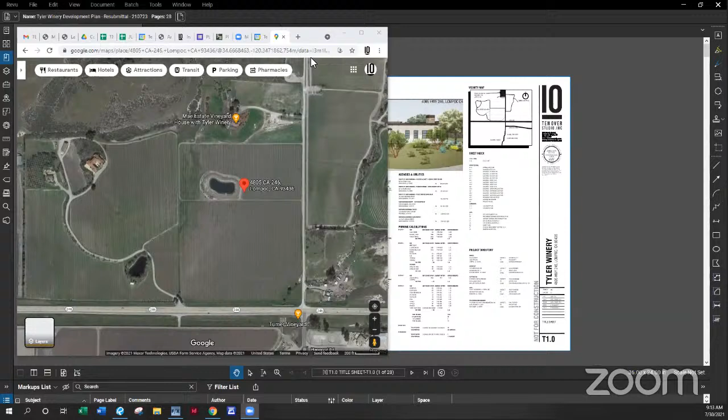Okay, so it's been a while since we were in front of your board, actually a couple years and a couple months here. Our last visit was back in May of 2019. Not that I want to dive too much into the previous design, but I'll give you a visual. This was the initial project scope and design: basically two buildings on the site, which we were locating in the northeastern corner of the parcel.

Since 2019 we've been working with our planner, Shannon Reese, going through the environmental review, getting a biologist on board, coordinating with EHS and the different agencies. But for several different reasons, the client, Justin, decided to make a significant design change from the original two-building design to what you are seeing today and what I'll present, which is still a development in the northeastern corner of the parcel.

The biggest difference is that we've moved away from building one here being a two-story building in that original design to now being a single-story building, creating a cluster, a courtyard effect with four different buildings, each serving a different purpose in the winemaking process.

The reason for moving away from the original design was to create a more efficient operational flow with winemaking, recognizing that the second story was serving office space, administrative needs, and guest serving on an appointment-only basis. It didn't need all the grading work and effort of bringing that secondary road and turnaround up top, and we could achieve that with a more understated and simpler design through building 4 down here where my cursor is.

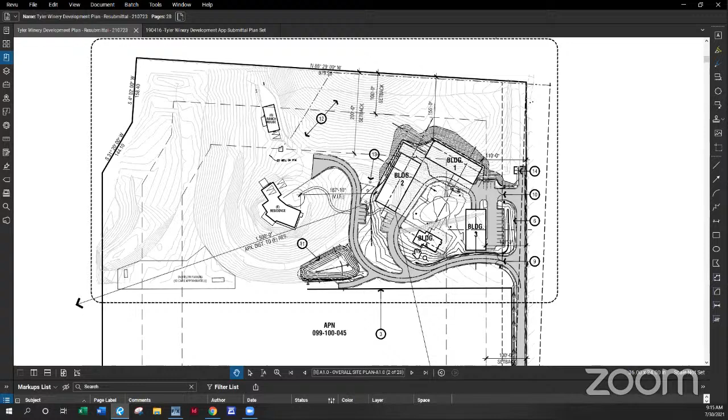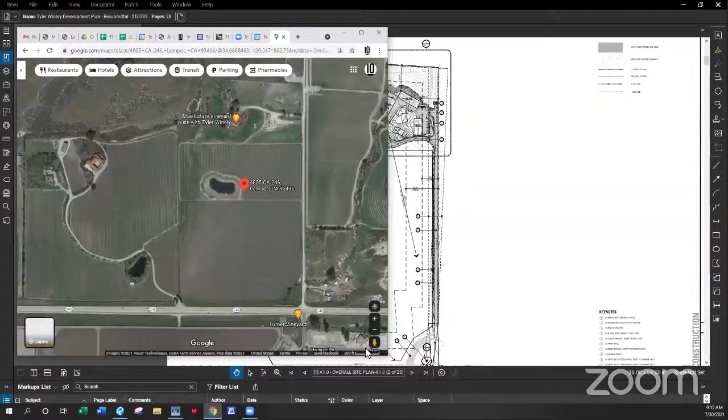Just to back up a little more, if you weren't familiar, here's the overall property in Google Earth. Street view is right here. Actually, wait, let me see if I'm turned around. I might be, hold on one second. No... Isn't quite looking right, let me go back.

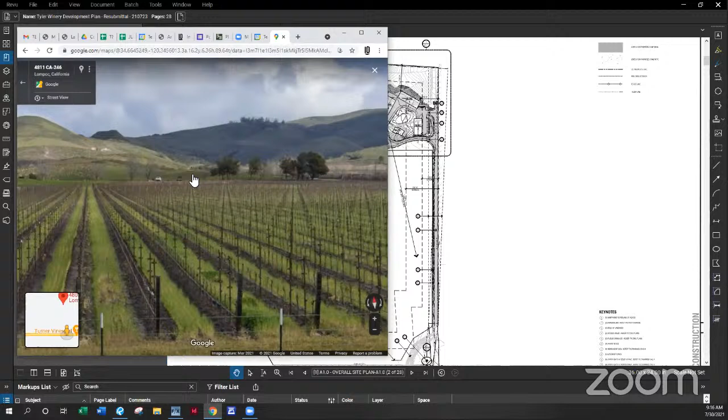There we go. Okay, so here's the vineyard fronting Highway 246. And if I zoom in here, you can see there's the existing residence. And then where this grouping of trees are and where these cars are is approximately where these single-story buildings are going to go, in the northeast corner of the property.

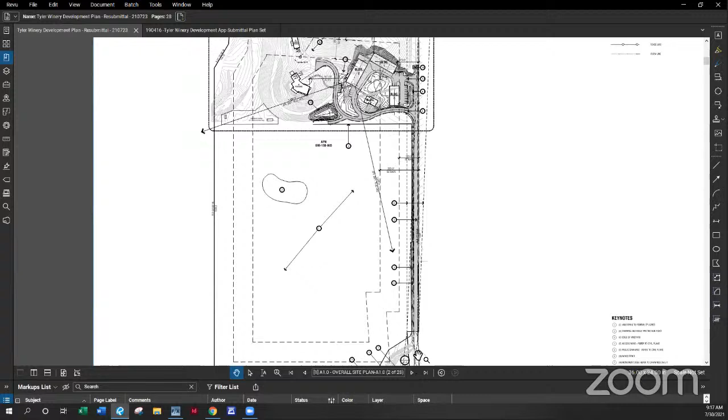There will be a shared easement, which links to adjacent parcels to the north. And so this road will be improved to CAL FIRE standards, coming all the way off of Highway 246, from down here where the gray hatched area is.

As you approach, the intent of the layout is there are 2 gate entries, both of which we've reviewed with County Fire to make sure we're providing adequate access and addressing their needs. The first gate, the southern gate, would be primarily used for access to the existing residence and ranch house, but also giving guests who are coming for an appointment access with a small grouping of parking spaces here to the south of the building cluster.

The secondary gate would be used more for production needs, as this area, shown with a lighter hatch, is a concrete working space, so to speak. And then the center area is just outdoor gathering space.

So I briefly touched on building 4, which is offices. I'll go through the floor plans and elevations shortly. It's offices and guest serving space. Building 2 is wine production, the tank room, and cuverie. Building 1 is barrel storage and case storage, and building 3 is an accessory ag building for farm equipment. This is an estate vineyard, so there's plantings here as well as an additional vineyard block to the north.

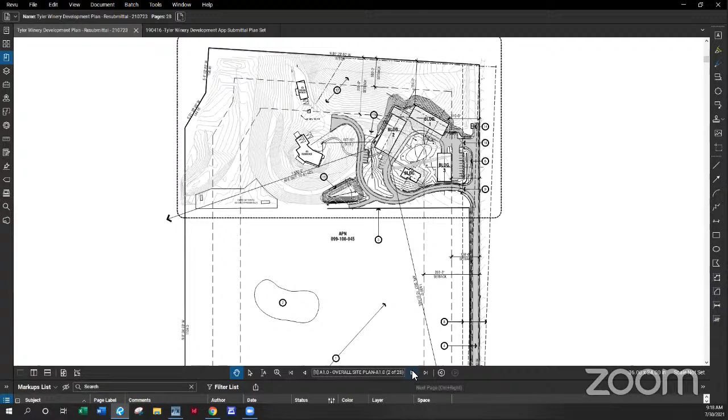Feel free to interrupt if there's any questions so far. So I'll just quickly go through the floor plans. I do have one question: how high is your office above the road directly below it? I don't see a grading plan yet.

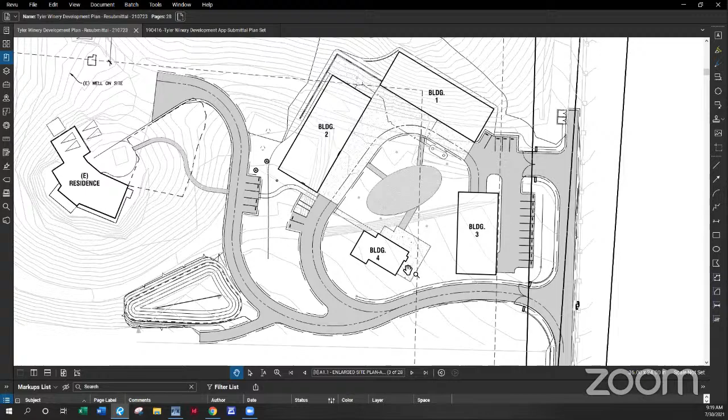Oh yes, I'll get to that shortly. That was another reason why we worked on this. You can see this is showing a good look at the existing topography. The hillside, building 1 will be banked into the hillside quite a bit, but we're trying to work with the contour to minimize slopes for this circular vehicular path, keeping them below about 6%. Our civil engineer is on the call, but we're picking a contour here below this bench right here. So these buildings are pretty much at grade with your gate entrance here, and that sets the stage for the finished floor elevation for each of the 4 buildings.

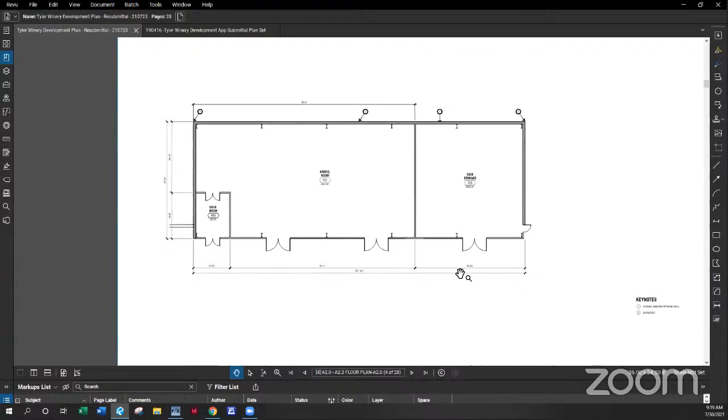This is a simple floor plan for the ag storage building, just giving tractor access. And this is building 4, a small building which you'd come into from the east, from that parking area, to a small reception area, an informal living room setting for appointment tastings, a staff break room, 3 offices to serve approximately 5 staff, and accessible restrooms.

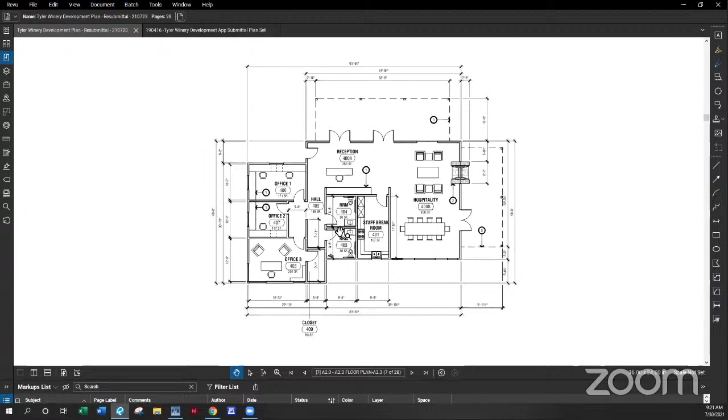These are just going through roof plans. I won't spend too much time on this unless we need to come back to them, but I'll jump quickly to the elevations.

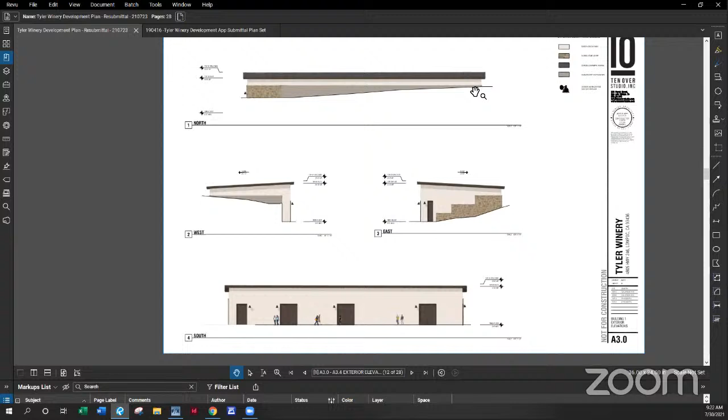This is the elevation you'd see of building 1, the barrel storage building, which is a pre-engineered metal building. The exterior materials would be stucco prominently, but where retaining walls exist, we'd have cast in place concrete, which for the most part would get veneered with a natural stone veneer, not cultured, but true stone veneer. Along the north elevation and potentially the east elevation, we'd change to a standard smooth finished gray concrete, consistent with what's indicated on the material legend.

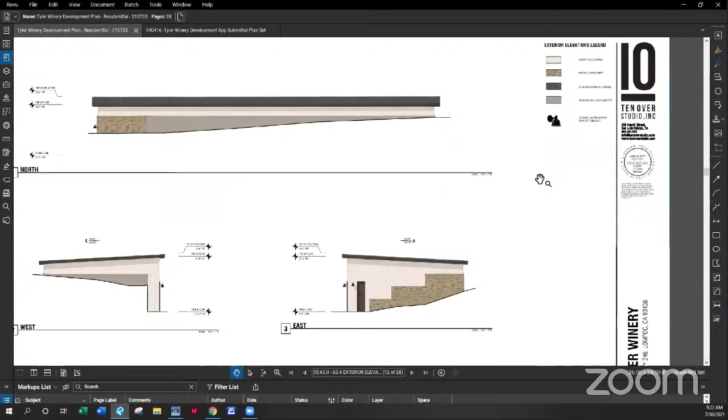Any outdoor lighting would be downward facing, dark sky compliant, and we've indicated those locations on the elevations, mostly pairing them with entrances into the building.

Building 2 is the tank and cuverie room building. Again, similar material palette, standing seam metal roof—I don't think I mentioned that for the previous building. These are low slope roofs, but we will do the appropriate detailing, ice and water barriers and whatnot, to coordinate with the standing seam metal roof.

This building does have what I'd call spandrel glass, like a seamless glazing system on the south and east corner, which gives guests visiting an opportunity to look into the cuverie, which has these beautiful wooden oak tanks.

Some detailed elements here: stone veneer at the base of the glazing system, and then all of the doors will be painted metal, like hollow core metal door systems and/or roll-up doors.

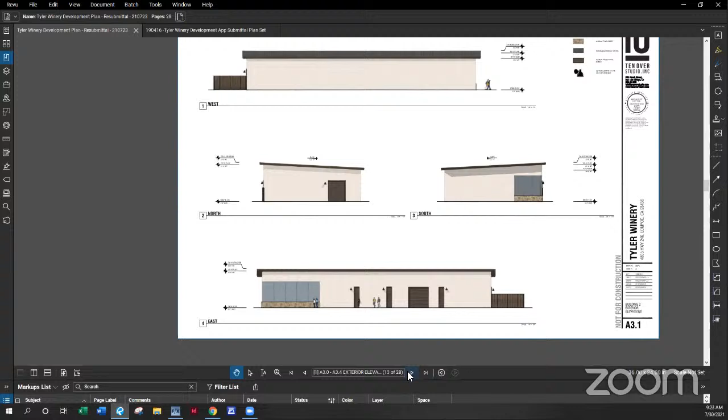The ag building is also a pre-engineered metal building. We're changing up the siding here. This one is the building furthest to the east, which faces the easement road, and just in character with its use, we wanted to change up the materials.

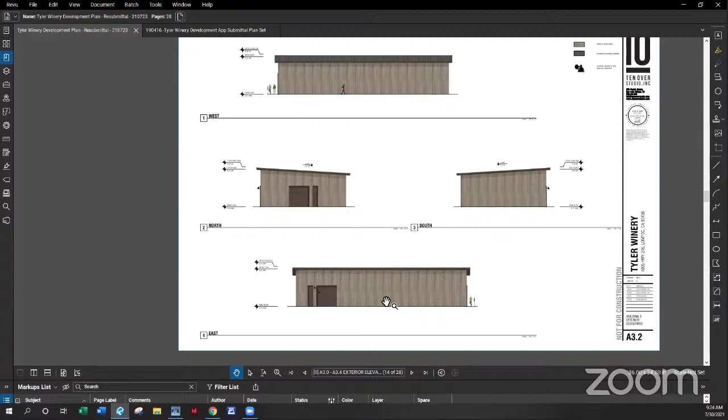This will be a vertically applied tongue and groove, likely cedar siding, but in order to do that it's a rain screen detail. One particular product we're looking at is hewn—to be determined—but it'll be stained to get this somewhat weathered look you see in the rendering.

Lastly, this is the smaller building 4. This elevation has a similar palette, a nice warm white smooth stucco. We're looking at a couple different window systems, but they'd be aluminum clad and/or steel window.

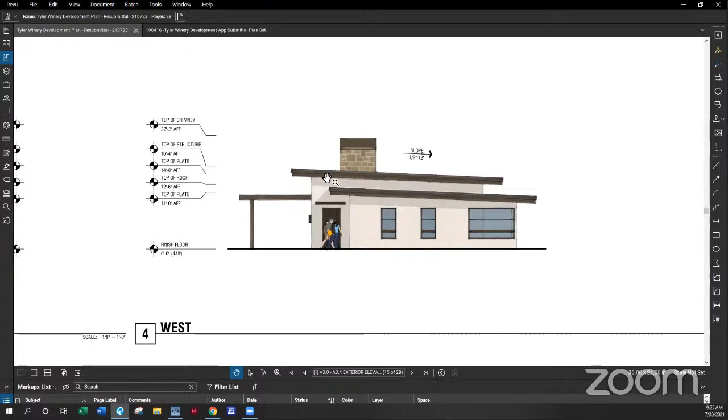We need to make sure we're complying with Title 24 and energy efficiency. There's also a change in roof elevations—a lower set roof over the offices, and a higher set roof over the hospitality or reception living space.

This is indicating we'd have a pergola system on the north and east sides, which would have retractable shades, and you can see that here as well.

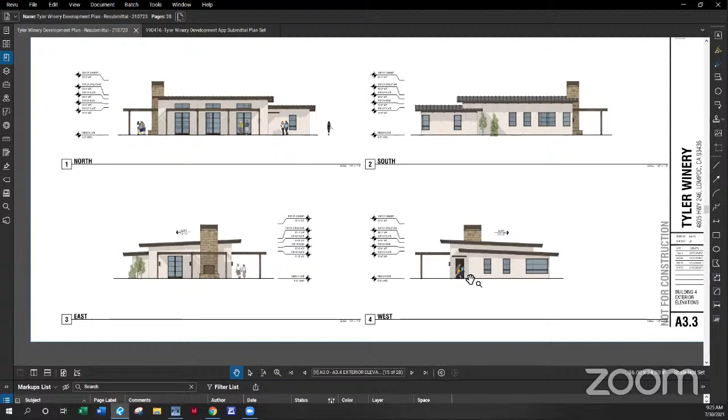This is the east elevation as you approach the building, and this is the south elevation as you drive in. You can see that standing seam fireplace element on the east side, again with the same stone veneer we'd be using at the other two buildings.

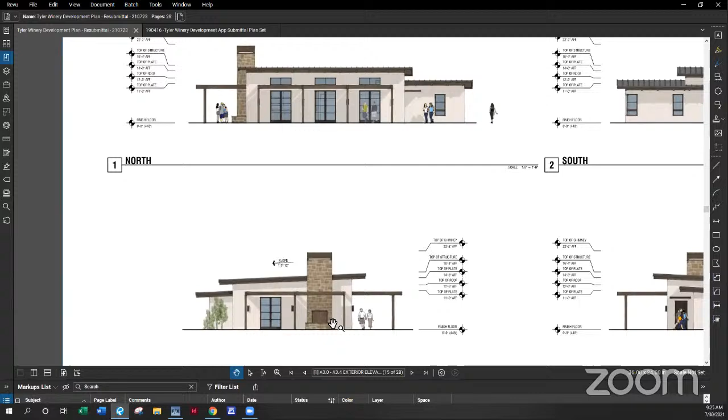This is the elevation facing east with the outdoor patio. I'll go to the landscape plan in a moment so you can see that outdoor context. And then this is the north elevation.

We have a couple of other site details. Your entry gates, similar palette of vertical stained wood boards for the gates. These would be swing gates, and then stone veneer pilasters.

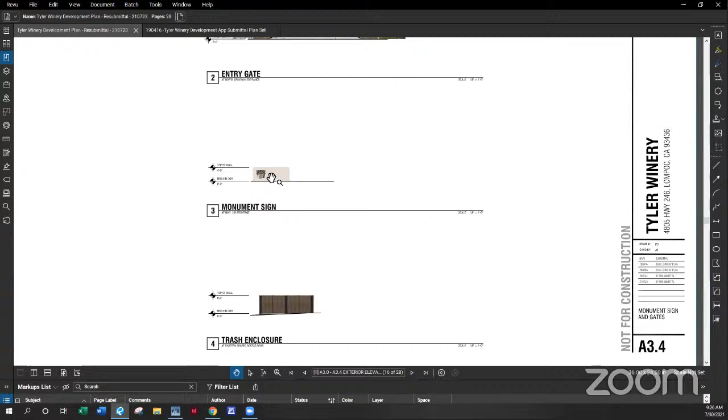This here would be a monument sign, which we've indicated down closer to Highway 246. I'll show where it is in the site plan—small, at a height of 4'6" and approximately 8 feet long with the Tyler label.

And then this is just an elevation of the small trash enclosure, which is accessed from the easement road on the eastern side of the property.

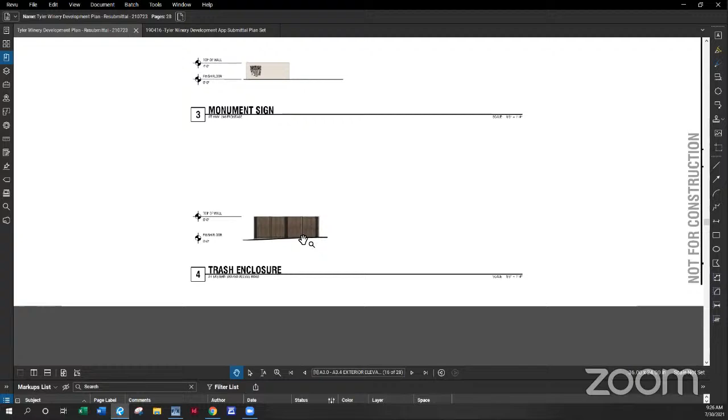Moving forward, these are a couple of context views of the existing site. Here's a view looking west, and you can see there's an existing road that comes into the site right through here up to the residence.

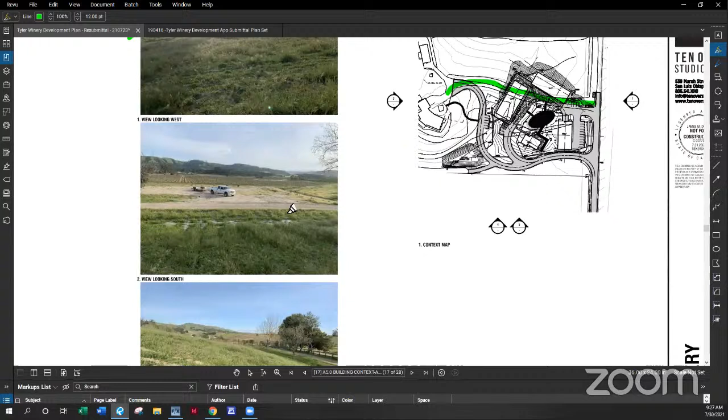Looking at the planted vineyard block and the hillside, this is standing on top of that hill looking down to where the buildings would be placed, just north of the existing vineyard on the south side. This is a view looking east from that hillside that building 1 is banked into. And then these are views atop the hill looking north at the knoll existing on the property.

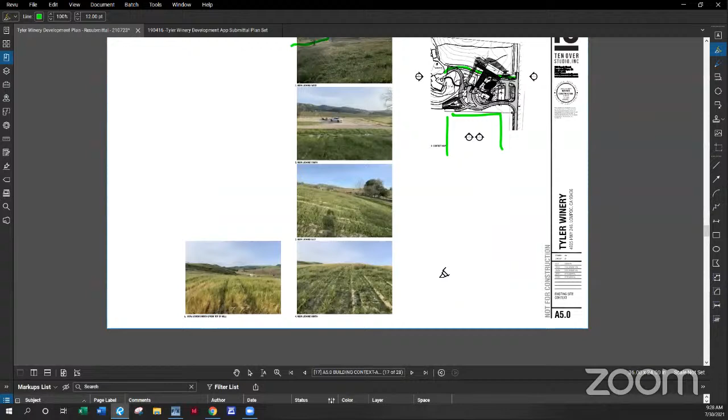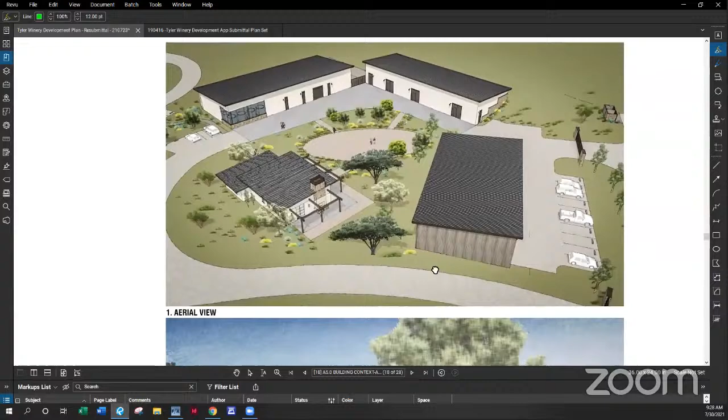This page shows some context views - I'll zoom in a little, but I don't want to move around too fast. This gives you an aerial of the 4 buildings in that central courtyard. This is a rendering showing the entry into building 4, and this is a rendering looking from the eastern patio at building 4 towards buildings 1 and 2. Then this is the north elevation of building 4.

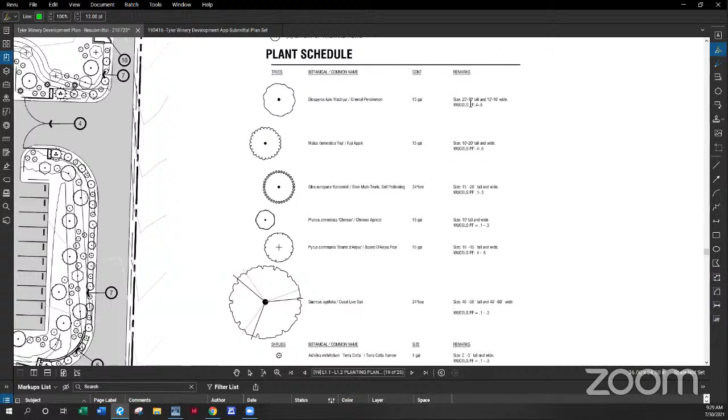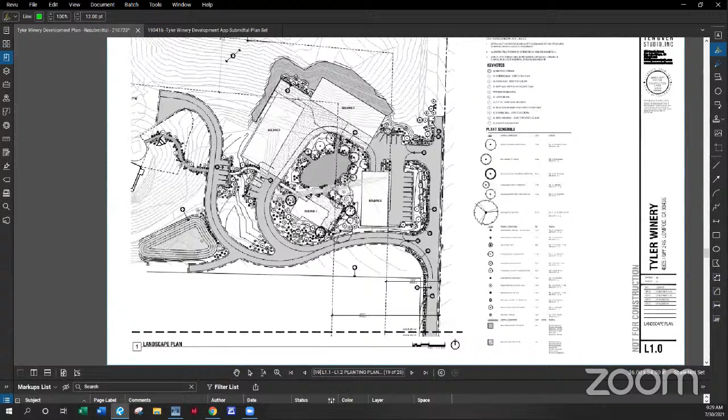We do have a landscape plan, and we've been coordinating with our biologist. There were a couple of different recommendations he had in terms of native plants, but the plant palette is all drought tolerant. Our WUCOLS plant factors here are all low plant factors, so low water using natives, primarily clustered around the courtyard space of building 4, but also planting along Easement Road as you come up from Highway 246, giving a bit of screening for building 3, and some intermittent planting along this pathway leading up to the residence.

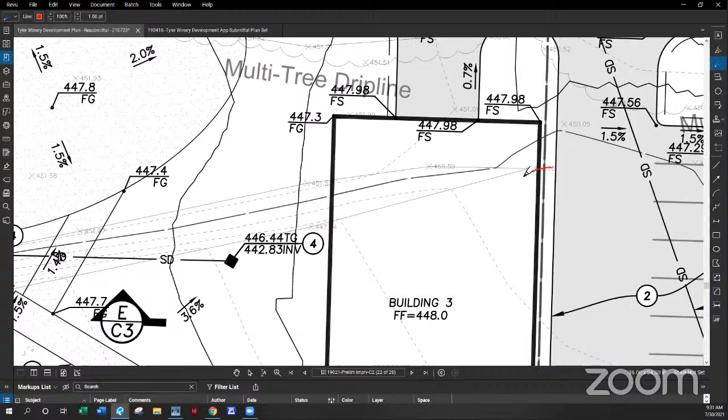The slope, these are all proposed grades back here, at I believe a 3-to-1 slope, which is still plantable. All 4 of the buildings are set at the finished floor elevation of 448, and that contour is right about here, existing on the site.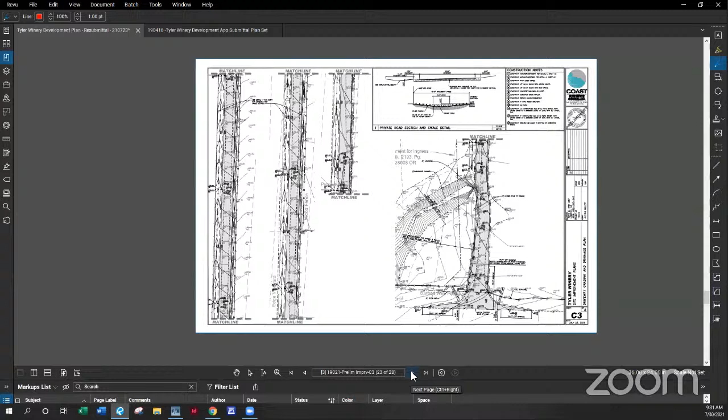With that, the rest of the sheets in the set are more technical drawings of the grading and drainage design, and here are cross sections of the site, which we can get into if desired, but I think I'll go ahead and open it up for any questions.

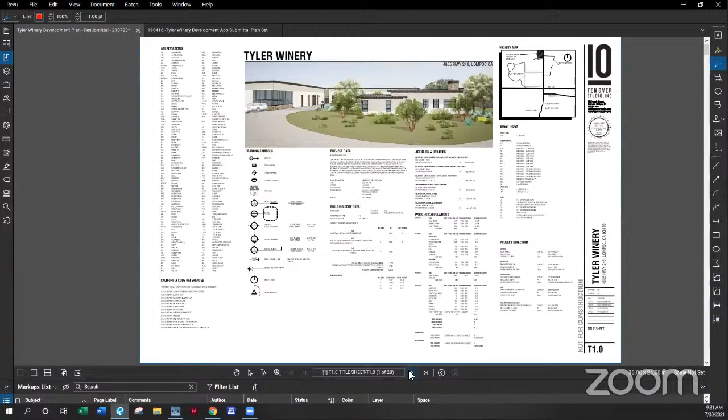I've got to find my sheets. Wait a minute.

Well, Jim, while you're doing that, I have a quick question. Julia, what's the material in the sort of elliptical oval shaped area in the middle there? That's planned to be decomposed granite, so a permeable surface.

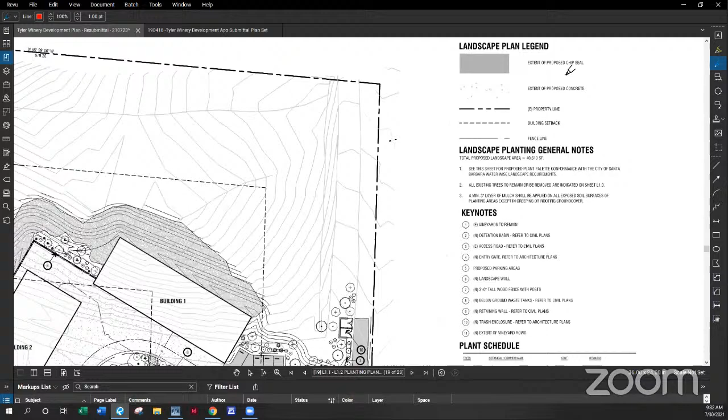Let me go to the landscape plan, sorry, give me one second. Oh, we didn't call it out here, but yes, that is intended to be decomposed granite. Okay, thank you.

This is Jim. I was looking starting at the bottom, I guess - your trash enclosure, monument sign, they look fine. The entry gate, you're going to be using the stone that you're describing earlier on either side? Yes. And then what's the gate?

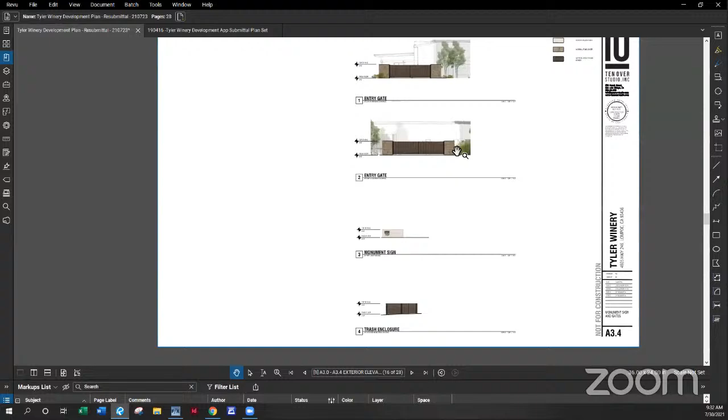That gate's made out of, is it wood? Yes, vertical wood stained board, so large, probably 2x10 boards set into a metal frame.

Are you going to put a cap on top of the stone in some way? What's your plan for capping it? Yes, you can see there's that dark line there. I'll go into the plan view, but really, that's okay, yes.

That looks really good. The house is very clean - building 4 is nice. One thing I have to say in general is that most of the buildings are stucco with a fairly light color. You're going to be able to see that for miles, so probably we want darker colors.

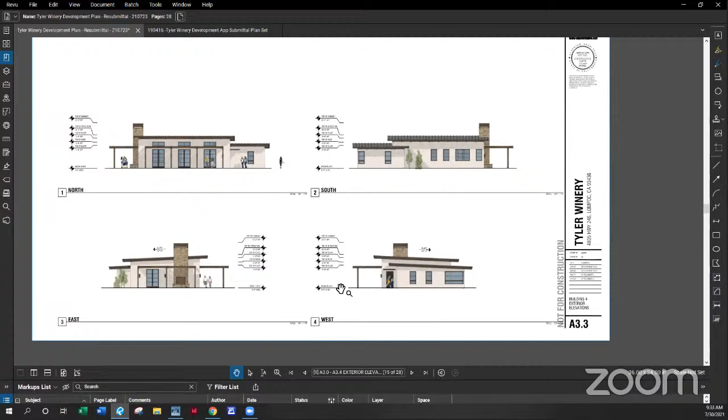It looks like you've got about 3-foot overhangs on building 4. Is that what I'm reading? Let me go to the roof plan to give you an absolute answer. It looks about 3 feet, which is a nice overhang, giving some nice shade. Oh, it's actually 4.5 feet. That's even much better - on the north and south sides, and then just over 2 feet on the east and west sides.

The east and west sides, one of them has windows on it.

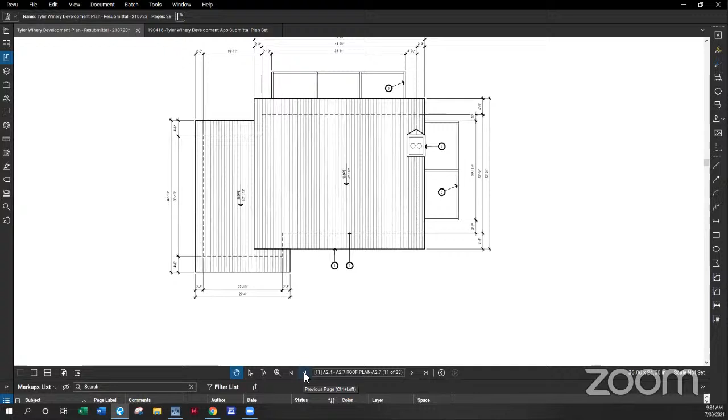2 feet might be enough, but take a look at 3 feet. You might get better shadows. Sure, especially here. Then go into the main buildings.

You had a lot of texture on the original design that is gone now. It's very clean stucco on building number whatever.

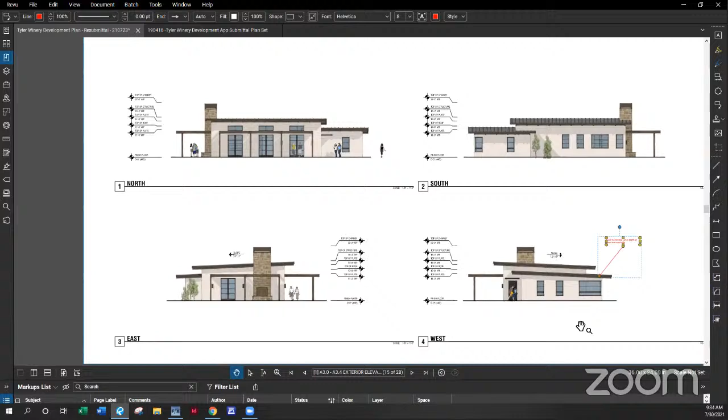1 and 2. And like let's see, building number, the one with the spandrel glass, that one on the corner. A couple of things about that is that it's got a high forehead, the building.

Why did you run the roof the way you ran it? Why didn't you run it the other direction to lower the profile in the front? Did you think about doing it that way? You mean long ways? No. You've got the slope running toward the back of the building. So have you thought about turning it around and running the slope the other direction?

Yeah, like that. Right. We had, and the preference, while you said it has a bit of a forehead, the preference was to see more of the face of the building rather than to look more at the standing seam roof profile. You're not going to really see the standing seam when you're there. You're going to be looking below it, and the proportions are going to be much shorter.

And you can also use that roof to help with the problem that you've got in sun control on that window in the corner, which has none. Just a suggestion or something to look into. But the sun control is another thing too. You have an opportunity to do something there, and there isn't any sun control at all. It's a void, a negative space.

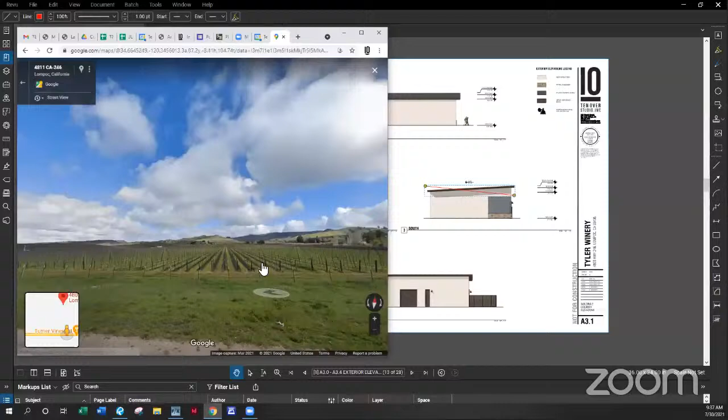We didn't prepare it for this presentation, but we have the model and the terrain done in 3D, and I'd love to share what the scale of the buildings does look like from 246, because that's why I kind of wanted to start with what the street view was. You mean in terms of color? Well, in terms of color and scale. For example, the house is a light gray color.

In general, when you have a light color in an area like that, it's going to read as bright white when the sun hits it, and it's going to also be very visible, like a pinpoint, and so a darker color is generally preferred.

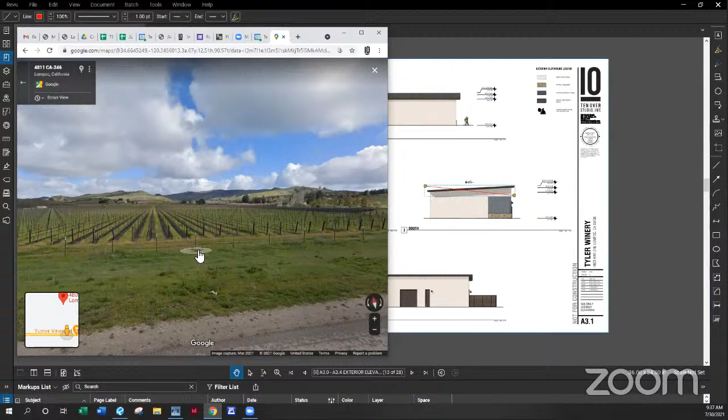Which way do you have? There's 3 large buildings that are around the courtyard. Which way do the roofs slope on each? I'm going to go back to that. On each one, one slopes. Yeah, so I'll do some arrows here.

There you go. Building 3, which way does the roof slope on that one? This one slopes, so the arrow is pointing to the high side. So building 3, it's got the low side facing the courtyard. Yes. Okay.

And then, sorry, building 4 slopes that way. Building 4 is a cute little building. Also, the overhang proportions on building 4, in terms of the scale, it's got a nice big hat on it. The other ones are much more petite because the building's a lot bigger. So it reads a little bit differently.

Anyway, we could look at increasing those, certainly, and just look at that solar, not to try to imitate it, but to give it some hat and some shadows, and so forth, because it's very simple, it has to be done just right.

That's all I've got so far. Thank you.

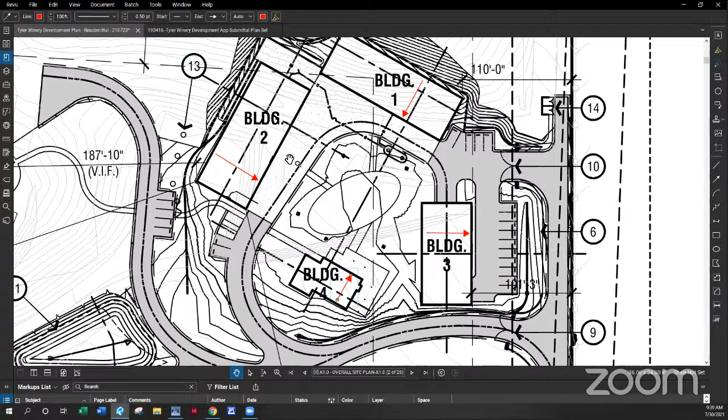Hey Julie, what are the setback lines that are indicated on your site plan? The 200 foot? So you can see here is the 100-foot setback right here, and then this was the 200-foot setback.

And what's the purpose of that 200 foot setback? Let me go into—I'd have to pull it up, actually, I might have it in my binder right here.

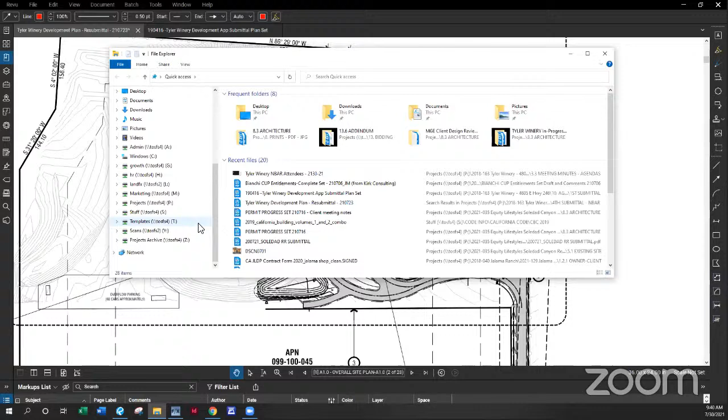So the 100-foot setback is: structures and outdoor use areas associated with the winery shall provide a minimum setback of 100 feet from adjacent lots. This setback shall be increased to 200 feet if the winery includes public tours, public wine tasting, retail sales, or special events. That's why we put that 200-foot setback in, just to indicate where building 4 complies with that 200-foot setback.

But it's not meant to say that all of the buildings associated with the winery use need to comply. It's something that Shannon and I have gone back and forth with.

I like that you went out on a good day to get those site pictures where we've still got green. Yeah.

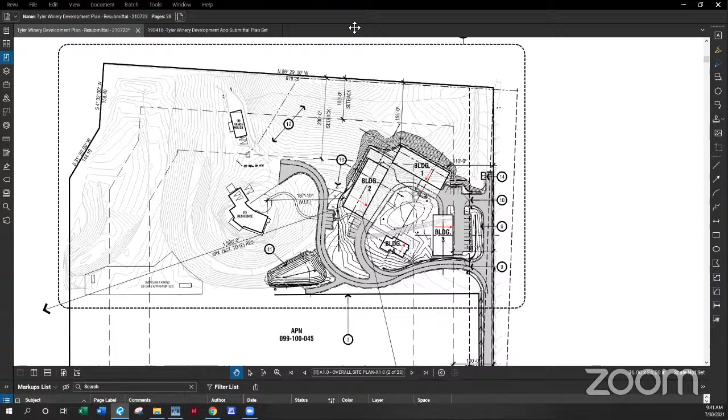I personally don't have any issue with the color, only because, with the existing residence out there being as light as it is, I think the 3 buildings would complement that. I also think that when you go out on a good day and you've got a lot of green on the vines, it makes it a little bit more inviting to know, oh, I can see the buildings from 246. That's the direction I have to go, type of thing.

I like the color on the barn building that you've chosen, going back to a more rural application on that. So I personally have no issues with the colors at all. I do like the overall design of everything, and I appreciate the fact that you've gotten away from the 2-story buildings and just created a courtyard for that.

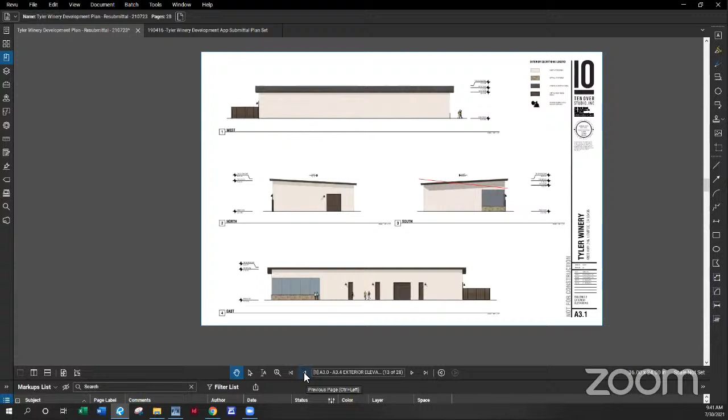I understand, looking at your grading plan, that you've got about 10,000 yards of cut that you're going to disperse along in the ag portions of it. That was a challenge.

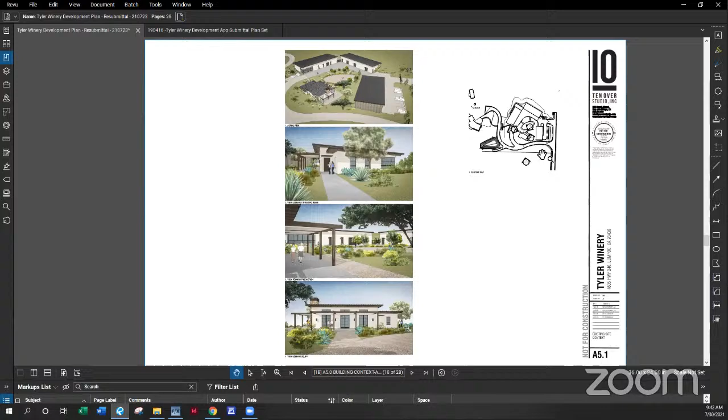What really is driving that, and I'll zoom into this diagram, is really trying to create a safe working environment for the tractors, for the forklifters coming off of these 2 adjacent vineyards. Any cross slopes greater than, I think we said 7% is the steepest, right here as you drop down from the access road into the property. That was a real big concern of Justin's, making this a real simple and safe environment to operate the equipment in.

So there's the trade-off. Now besides the tractor traffic, are you going to have truck traffic as well going through there? That was only accommodating for CAL FIRE, their emergency vehicles. But no, everything that's — oh, well, there will be a bottling truck. Yes.

Well, that's all I have for now. This is Steve. I'd also like to compliment you on this project. I think it's a nice improvement from the previous one by lowering the scale down.

I'm with Michael, I don't have any problem with the colors either. I think the lighter colors are much better for the energy and everything associated with that. One thing maybe is that you could develop that center oval area as a seating area, maybe some trellises out there to make it more inviting and more useful for picnics or whatever. Other than that, I like what you've done with this. I think it's an improvement from the previous one, and I'm good with it.

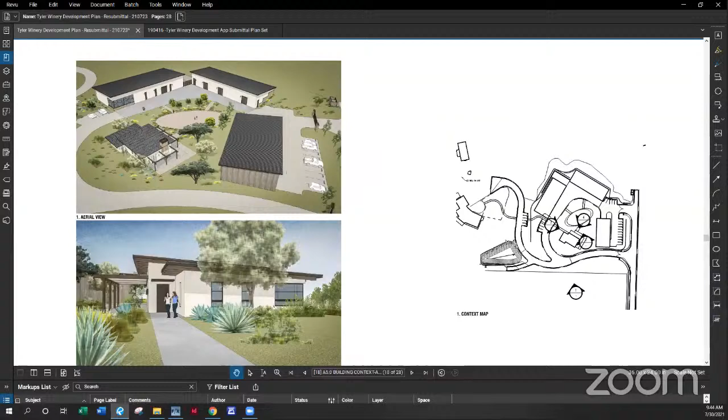Bobby or Kevin, do you have any thoughts on the project? No, I'm good.

I had one really minor one, and that's on the plant list. Coffee berry produces berries that attract birds, and that's kind of the last thing you want when you're adjacent to vineyards like that. So maybe reconsider that one. Okay.

Thank you for looking at the palette. One other minor comment: when you come back, make sure you show us where you're planning on putting your joints and your stucco to work all that out, because that's going to be something that's important. Okay.

Eric or Leah, do we have any speaker slips on this one? Mr. Chair, I do not have any requests to speak on this item.

Well, I believe you guys are agendized for conceptual review. Looking at the project overall, I have no issue with you guys working with the planner and coming back for preliminary. I think, looking at the list of concerns we've had the first time, we've addressed everything on those items that relate to this new configuration. Providing the site sections was pretty important as far as the first review is concerned. So I appreciate you bringing in the grading plan and your consultant to provide those.

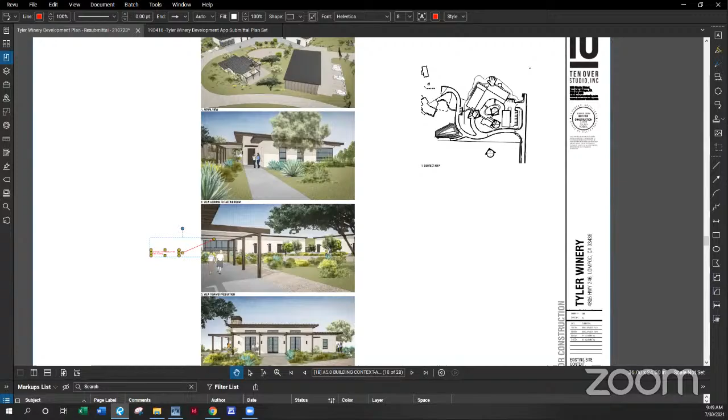Good morning. My name is Troy White with TW Land Planning and Development, the project planner. Can you hear me okay? Yes. Okay, wonderful. Thank you so much. Also with me today, we have Jay Preto, who represents project ownership, and then Aaron Carroll, our landscape architect.

I'm going to go ahead and share my screen here. Let's see, share screen. Can everybody see the plans here? Looks good. Okay, wonderful. So this project site is located at...

851 East Highway 246. If you're familiar with the county road yard, it's just to the north and west of the county road yard on Highway 246. It's a 10-acre site, zoned Ag 2. It's a former nursery and cut flower farm, and the proposed project is a change of crop going from cut flowers to cannabis.

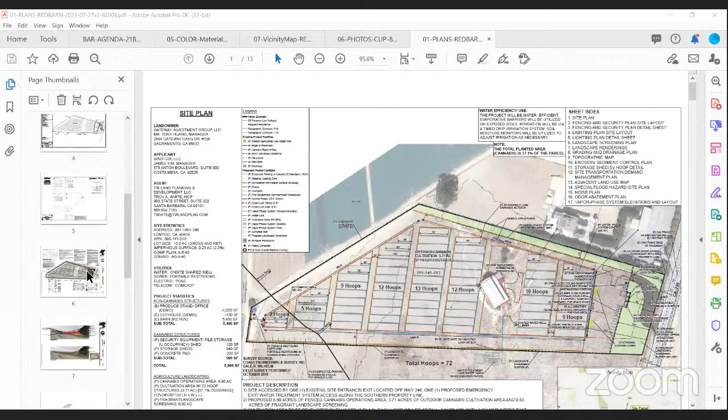So I can show you, let's see here. This is our landscape plan, and I'll have Aaron Carroll shortly go through the landscape plan in more detail. I'll show you our sheds. These are the 10 by 12 sheds, of which there will be three sheds, all non-habitable.

Two of them utilized for storage of equipment and materials and supplies. One will be equipment, materials, and supplies, but also have an IT server component to host the data storage required by the Santa Barbara County Sheriff's Department. Let's see here, I've got a color material board.

So right now we're looking at the Tuff Shed manufacturer. There's an existing barn on the property. We're not going to be utilizing that, so it'll just remain in place. But we tried to match the color of that barn, although these are only 12-foot tall sheds. Once the landscaping's grown in, they should not be visible, but for sake of consistency, we wanted it either a Cherokee red or a brick dust. As you can see, they're hard to tell the difference between the two.

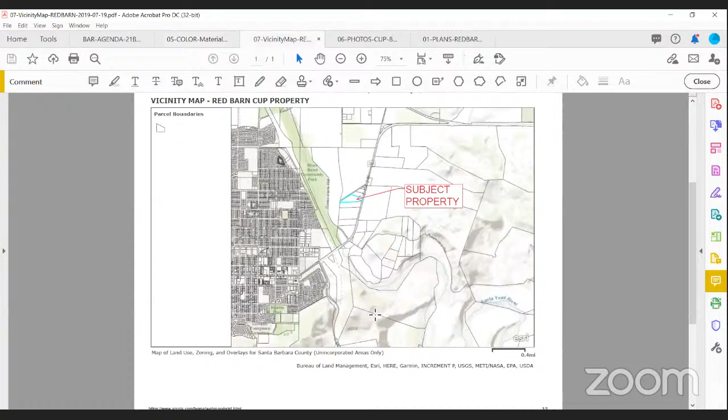So I'll go back to the plans, and let's see here. And we'll have Aaron explain a little more about the landscape concept, and then we'll go from there. So Aaron, if you want to plug in.

Sure, I'd appreciate it. Can everyone hear me? Yes, we can. Good morning, everyone. Aaron Carroll, landscape architect for the project.

The concept for the landscaping on this project and the project to the south is to have fragrant plants planted along 246 and also along the north property line. We've got plants like osmanthus, jasmine, pittosporum, Matilija poppy. All these plants have fragrance at certain times of year, and the idea is to mask the scent of the cannabis cultivation.

On the northwest and south property lines, we've got a mix of native pine trees and coast live oak trees, as well as some native vines growing on the fence. And the neighbor to the north has a well-established row of Peruvian pepper trees as well, so we have some off-site screening as well. So the site should be fully screened from all sides.

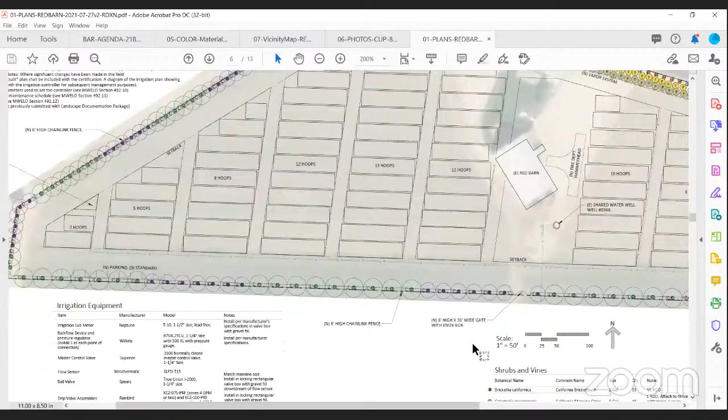It's just that my only comment before you get into the book is that it's very uniform. The planting is very regular and in a line, very unnatural, on the south line in particular, and it's also on the west side. It's very linear as well. It seems as it should be a more natural arrangement somehow. That's my only comment. Oh, and it should be indigenous to the area, the planting. I can't really see the legend on the screen here, but I would think if there's a variety of trees, you're going to get some height and some textural and color difference in there, Jim.

But these projects are really constrained with availability of planting space. Yeah, the bishop pine and the coast live oak. Could you guys consider adding in a third species? Sure, yeah, happy to. Okay.

I've got some alternate trees called out on the legend. One of those could be our third species. Under the notes, we've got Catalina cherry, Monterey cypress, and island oak called out as alternates. The island oak would be a good choice because it's a brighter green. Any of those would work for you to add in. There's a natural form alternate on the right-hand side. If you could mix it up a bit, I think that would help with Jim's concern. Happy to do that.

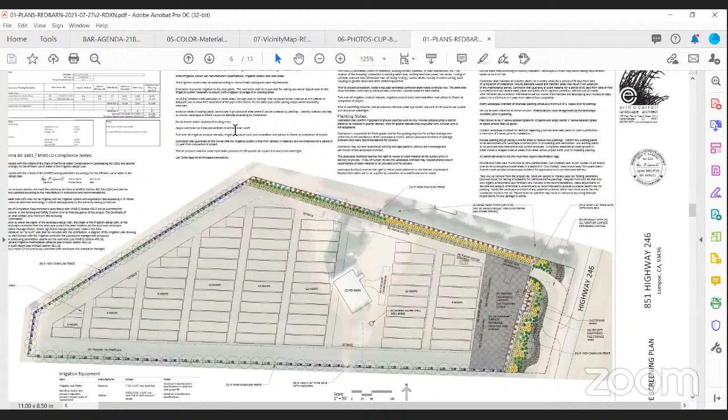Off of 246, what is your screening there? Besides the 6-foot fence and the shrubbery in front, there are fragrant flowers in front. Could we go to the rendering from 246? There we go. In the back, the highest planting along 246 would be the pittosporum, and then we've got some osmanthus, Matilija poppy, star jasmine, and lavender — all fragrant plants. So that's a 3D rendering of what you'd see from 246.

What you see is what you'd expect it to be once it matures — that's at approximately 5 years maturity. The pittosporums will get 15 to 20 feet high if we let them grow as trees, and they're very fragrant when they're blooming.

With the amount of plants up there, are you concerned at all about contamination? Is there a possibility, in terms of the cannabis grow? I brought that up early in the process, and the ownership was not concerned with that.

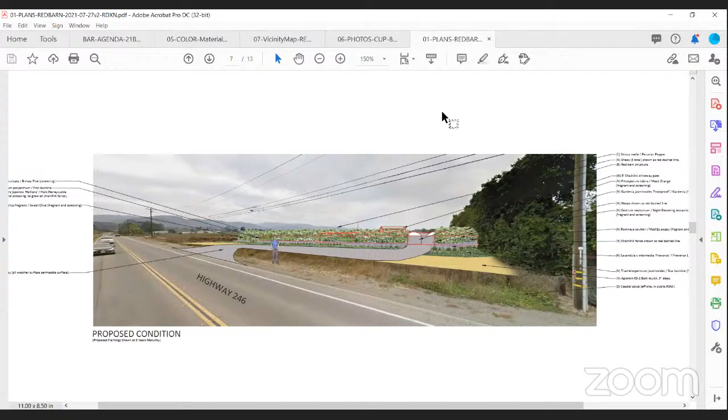Other than that, what is the material of the gate? What are you proposing for that? The gate will be a chain link gate. Let me show you that. That gate will be set back approximately 100 feet from the highway.

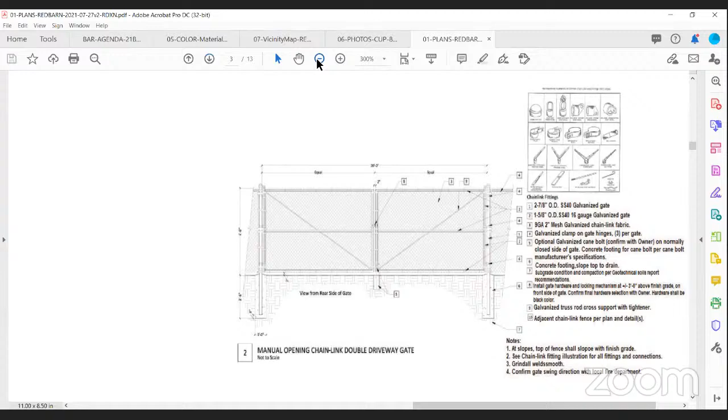And you have no plans for the barn at all? No, given its age, thinking of touching it just gets complicated. So we're just going to not use it, and it'll remain a structure in the middle of the property.

I would suggest on your shed color, the trim color, that you think of a different color — it's a little Christmassy. I like the red, but you might reconsider. If you take a look at the barn, I was just trying to match some of the colors that were there. I'm happy to do grays — there's no pride of ownership in colors, we're just trying to match what's there. But if the board isn't interested in matching what's there, we can go with something else, and this is a structure that won't be demoed.

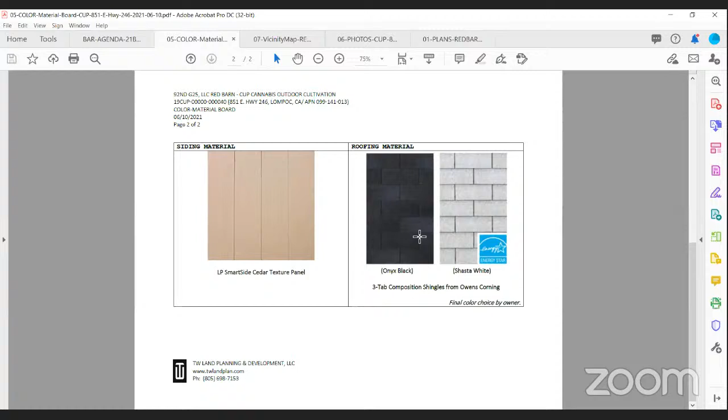Gardening equipment, we'll have ag equipment, supplies, materials, a couple, a few gallons of different types of herbicides.

If it was me, I'd just use the darker one. Yeah, it doesn't necessarily even have to be a solid black, it could be some of those. I think there's another color there, it's dark bark or something like that, primarily very dark brown. So something in the darker options, shades, yeah, I think so. Your preference, yeah, it'd make it go away.

Now, didn't you indicate that one of the sheds is going to have your track and trace equipment in there? Yes, that's correct. So probably you're going to need to either insulate that or provide a cooler roof for it, I would think. You may have to condition it.

I've talked. It's 120 square feet. It's either ag exempt or a U occupancy, and we're going back and forth with the building and fire department trying to classify. Typically it would be an exempt structure, so we're trying to determine how to classify it. But in talking with the security folks, they've indicated that it doesn't need to be a conditioned structure.

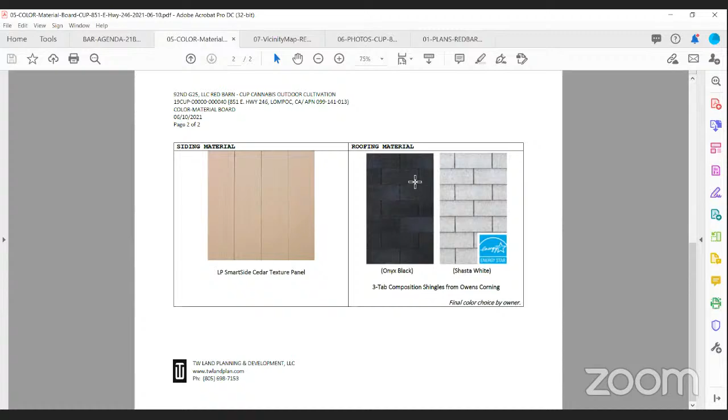Who's your planner on this? Gwen Byler. Does staff have any comment on this project?

Michael, I have one more comment to make. I couldn't really see the frontage in detail, but all I would suggest is do some layering with some trees so you get some height in there. I realize the pits will eventually get high, but if you had some trees across there, I think it would help it a lot.

Sure, yeah, happy to do that. Also, the frontage looks like it's going to be a continuation, it abruptly stops kind of. So I assume that's what you're doing on your next property, continuing the same stuff down Highway 246. We won't have the trees, although we can certainly look to integrate those, but it'll be the same landscape palette as you see here.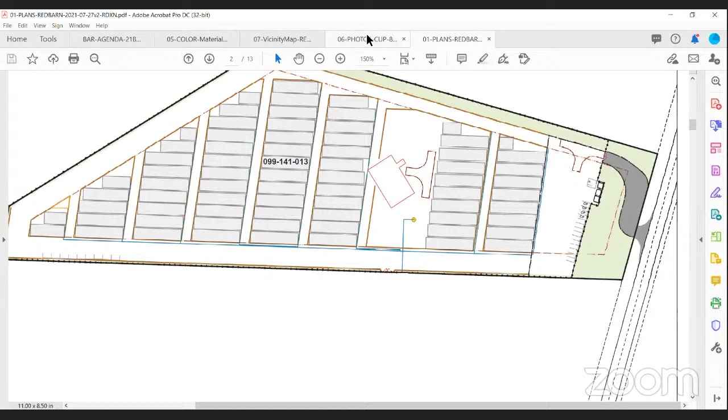And there's no currently, there's no landscaping there, right? Yeah, right now, let's see, this is what you have right now. Yeah, I love it. So obviously this will be a huge upgrade, but this is all farming, right?

This is North County farming, just along the highway, row crops. So we'll look a little different, a little more polished, with all the landscaping, but hopefully that's appreciated by this board and by the community.

Has Caltrans weighed in on this? Caltrans, we've been in communication with them relative to the property to the south, and so we'll be doing a new formal paved driveway apron for them. And of course, our landscaping, we just need to be mindful of the sight triangles, so we can't place trees and things that will obstruct folks' vision as they're leaving the property. So that'll be a part of our consideration in siting. That, and the power lines.

And the power lines, of course, as well. Yeah.

Is your next project next to it about the same amount of frontage on 246? Yeah, and that's actually, we're under construction right now. So fencing's up, hoops are being installed right now. Sheds will hopefully be there soon enough, and we're almost done with the Caltrans process, so then we'll start the driveway apron.

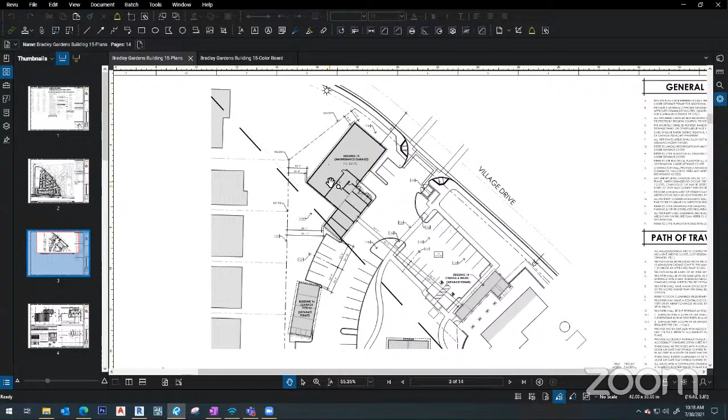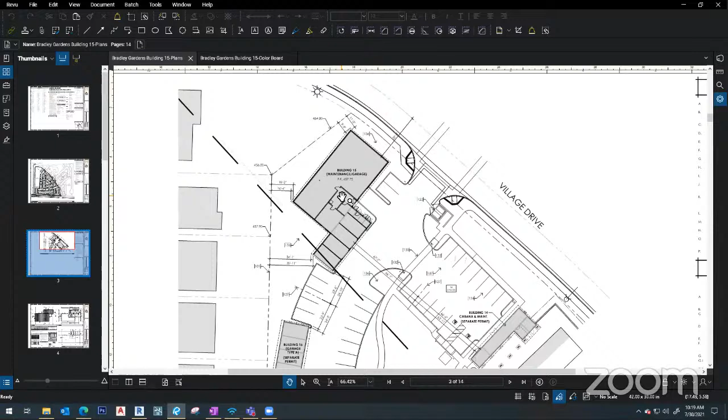Let me share my screen here. Can you see my screen? You can. All right, so just a refresher, this is a modification of a previously approved garage building. The original design was just this garage here. The ownership would like to add a maintenance portion to the back due to the size of the project as they've gone and it's been built - it's what they need. I think the primary concern before was with the adjacent neighbor and the height of the building. All of that, after talking with the planner, with Eric, falls within zoning approval.

We've provided a couple of spot references here just to show the grading. So the neighbor's concern here is about 458-ish, and we're pretty close to the same finish floor elevation. The site kind of drops off as we go down towards Village Drive. Sean, has this changed at all from the last time? No, the building itself we have not changed, and the configuration. As discussed prior, I think the board was leaning towards approval with bringing in a landscape plan and additional architectural details.

Wasn't there also a comment about some concerns raised by the neighbors with regards to the existing garages? Yes, as far as those are concerned, those garages aren't completed yet, so they haven't been rented out at all. I don't believe ownership would like to rent those out to anyone other than residents of the development. Yeah, so it's part of their lease. It's kind of an add-on - if you need a garage, you put in a request, and with the limited number of garages, they'll go fast.

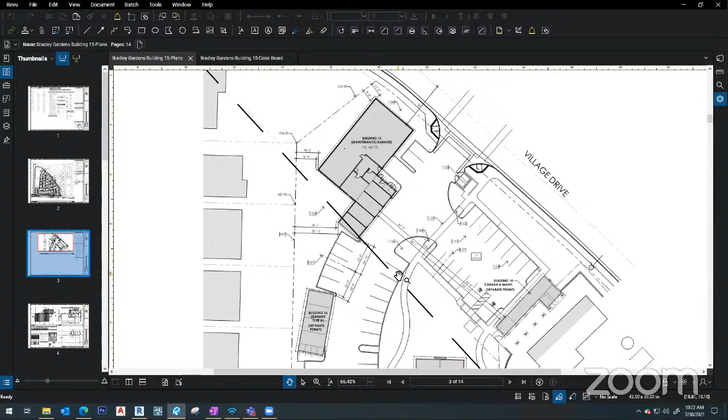I think I can jump to the landscape plan. This wasn't provided prior. The goal was to add as many trees as we can get on this backside to help shield the building from the neighbor. I think these are pines, and then we have coastal oak along Village Drive. So the idea is just to get it really landscaped as much as possible.

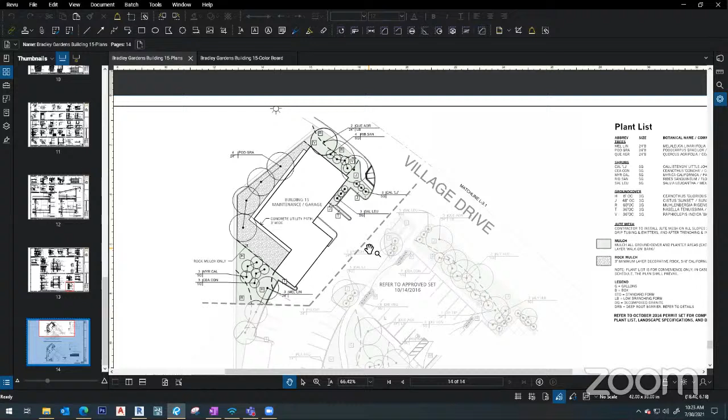Was his concern about the view over the top of the building from his second story? I think the main concern was the view of the building. Is that a 2-story house that he's in? Yes, it is. Is pine the best thing to put there? We could look at any other option within the palette in the project - they could end up being giant trees. Well, they're noted as podocarpus on the schedule.

I might have looked at the wrong one. But yeah, fern pine. How big did they get? Is the plant palette you're using consistent with what the apartments are using? Yeah, it's a continuation, just a modification of that palette, what was previously approved.

How big do those particular pine trees get? Do we know? I do not know. I have my landscape architect on board today.

So if you have any particular questions on architectural detailing - the detailing, you just added all of the standard details for the tract on it, right? And then you just attached them - they're standard for the whole enchilada. I can point out particularly the roof details - that's your typical roof, right? The corrugated metal roof. Yes, corrugated metal roof, that's typical for all the garage buildings.

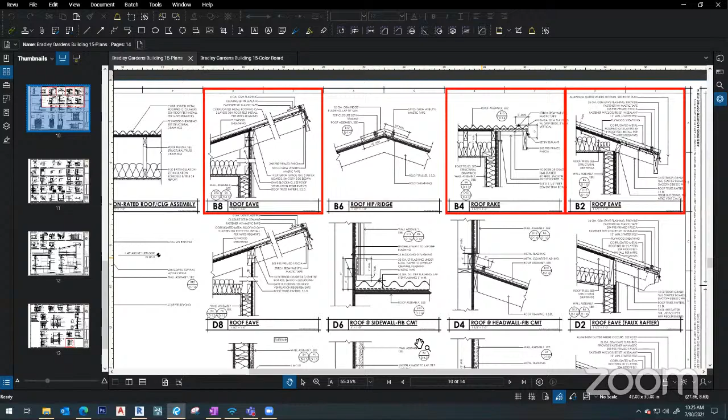Kind of highlighted them here. So at the high roof, exposed eaves here - they kind of vary through the project. Some of them are fire rated just because of proximity to property line, but these will be exposed. Same thing with the rakes and eave detailing. And the window detailing - standing board and batten and stucco at the base for this building, and fiber cement siding and plaster.

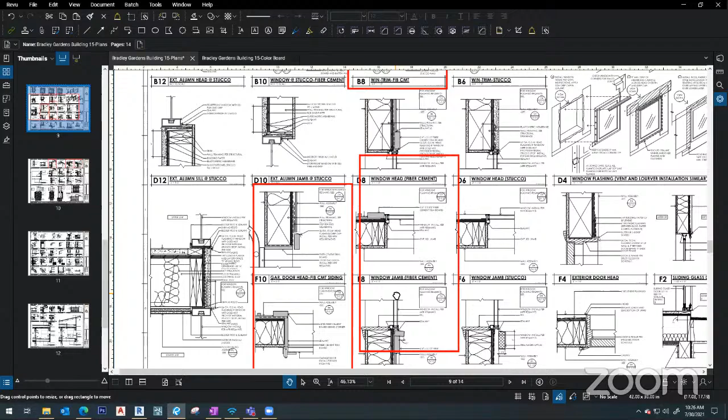Yeah, those are the main details. I can jump back to the color board just for a refresher here. Is the color board pretty much the gray color for all of them? It varies - different buildings have different palettes, but this is consistent with one of the palettes from another building on site. Isn't there one right next to it as well? Is it going to be the same color? I believe it's a different color - it just helps with wayfinding for residents, having a variety of different colors for the different types of buildings.

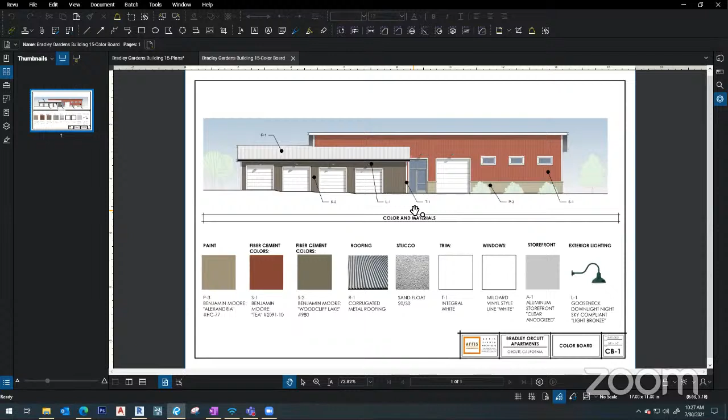How tall is your building? I see that your plate heights are 12 feet, but I was curious about that ridge height, that eave height up there. Oh, I had that on here - let me get that, approximate height here. About 17.5 at the top, 18 feet. Looking at that fern pine, according to Google, it grows 12 to 36 inches a year, but can be trimmed to grow no more than 20 feet tall.

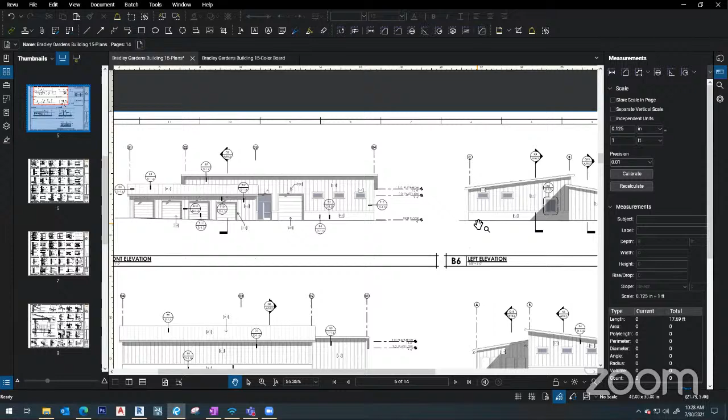Yeah, Sunset says it's basically 20 to 60 feet tall, 10 to 20 foot diameter, but can be controlled - clean, pest free, good for streets, lawns, patios, and soil. So maybe that would be a good one, huh? Yeah, as long as you maintain it, you keep it under 30 feet.

And Aaron, on his roof, the one facing him, does he have any roof equipment, fans, or penetrations up there? No, anything we have, there's probably going to be plumbing penetrations where they occur, but any mechanical units will be on the ground. Okay. Yeah.

Who prepared the landscape plan for this project? Was that Firma? They're the original landscape architects of the project.

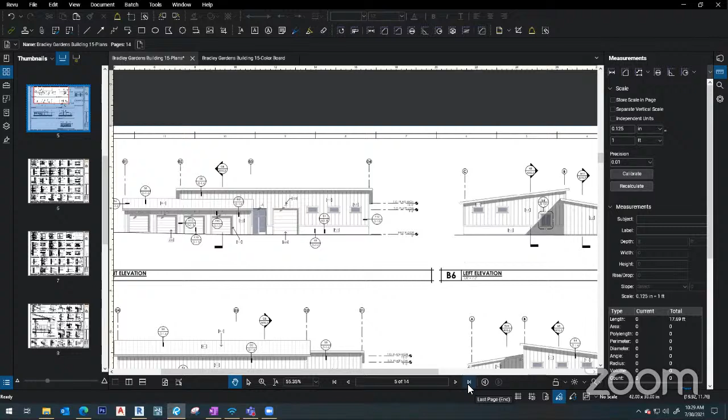The only thing I would say about the Podocarpus is it's not a low water type of tree. Do you guys have that on site already? I'm not sure, I'd have to look at the rest of it, but there might be. The other option is to use one of the other trees there, like the coastal oak. I don't have enough knowledge of landscape material to give you an opinion on that one.

Looking at just a small snippet of the existing landscape palette, it's mixed in the existing apartments already, so as far as continuity is concerned, it's probably a fine choice. Yeah, I'm okay with it.

Leah, do we have any speaker slips on this particular project? Mr. Chair, I do not have any requests to speak, and we do not have any attendees attending the meeting right now.

Can we go back to the elevation for a moment? And what was the roof material? What was the color of it? Was it galvanized? It is galvanized.

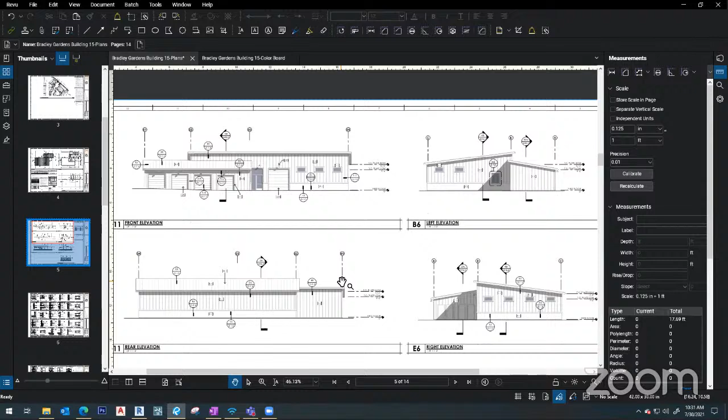I thought the first part was, well, maybe not. Oh, what would they call the Parke West side? They have corrugated metal, those little sheds. Yeah, it's in the neighborhood, let's say. There are some little sheds or outbuildings out there that have that corrugated single slope roof. If we look at the overall site plan here, this is that Parke West side, the more modern looking buildings. They use that material.

But all these garages along here are all the same corrugated metal. You just completed construction of some of those, right? Yeah, there's these two here, or under construction. The rec building and the cabana are all under construction. I'll have to go see the rec building. It's got a great volume at the entry there, two-story volume.

Okay, I have no additional questions. Any other members have any other questions? Bobby must be sleeping.

Okay, with no other speakers, with no request to speak, and the board being satisfied with the changes and having no further comment on this, I would like to get a motion for final approval. I will make the motion that we approve this project for final approval. Can I get a second? Me too. All in favor? Aye. Aye.

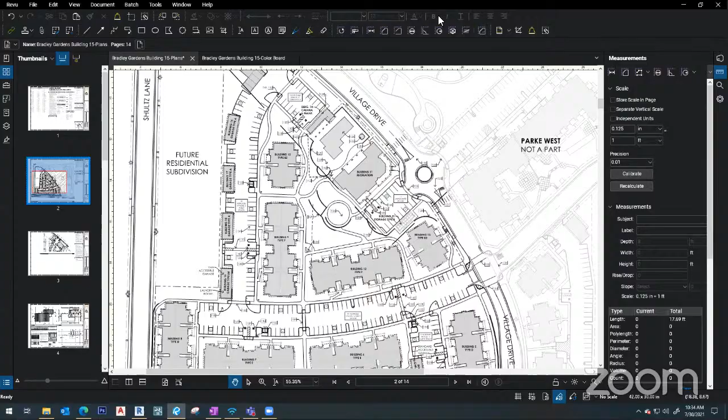Leah, do we have any closing statements? Nope, just my gratitude for going so quickly through this meeting.

Now, granted, with regards to the in-person meetings, have they contacted you in any way about that schedule? We got a quick update after the joint chairs meeting, but nothing has really been set in stone, and I haven't heard any updates since then. But I do believe BARs will be kind of like the second tier to come back in person. I think the priority is bringing PC back in person first, and then once we work out all the bugs with that, I think they'll jump on to BARs, and then some of the less visible meetings will come back in person as well.